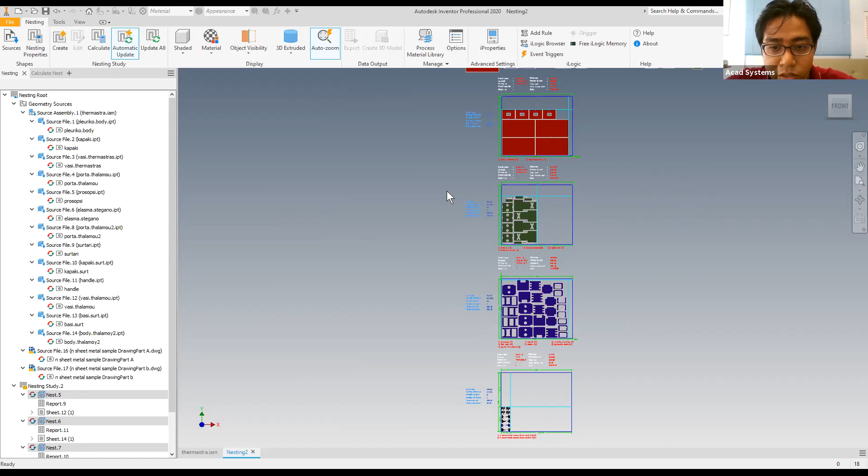Okay, so kat sini you boleh tengok lah. Bila saya dah recalculate, refresh, dia akan automatically adjust you punya stock metric kat sini. So this one will be kelebaran 3500mm dan juga kepanjangan 3000.

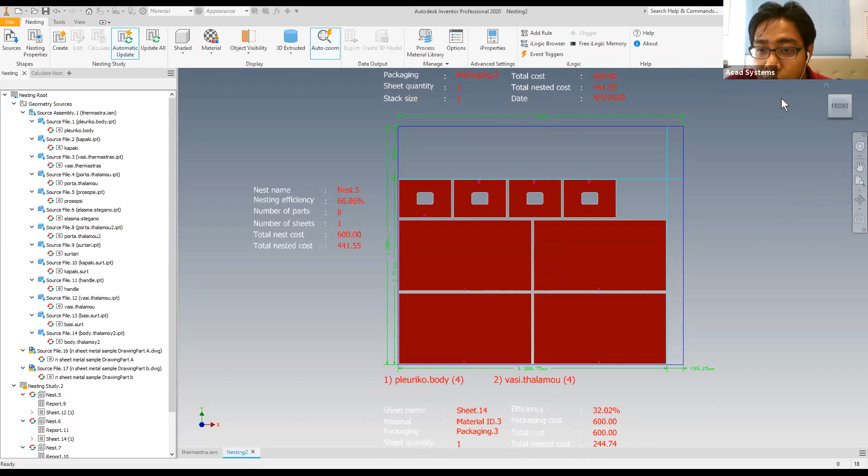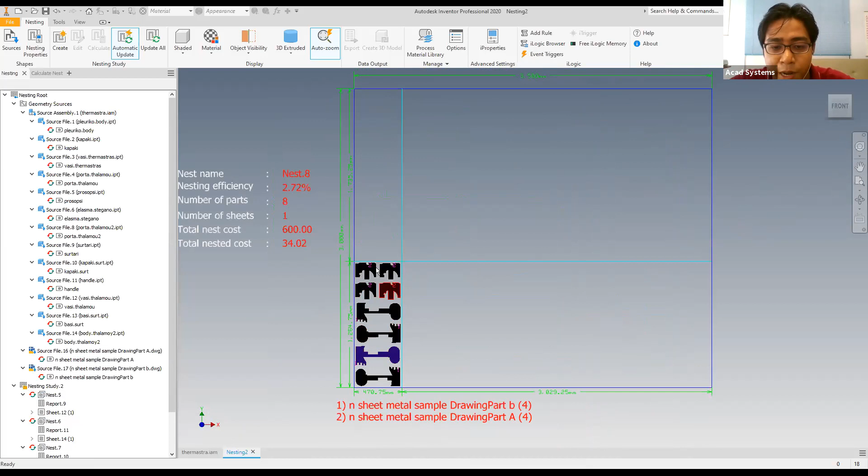Okay, so kalau you tengok ke bawah ni, ini dua part yang saya insert sekali daripada AutoCAD, daripada AutoCAD 2D sketching tadi. So kalau you tengok kat sini, daripada satu part ke satu part distance dia agak banyak, so agak membazir space. Bila you nak potong kat sini, banyak space yang membazir.

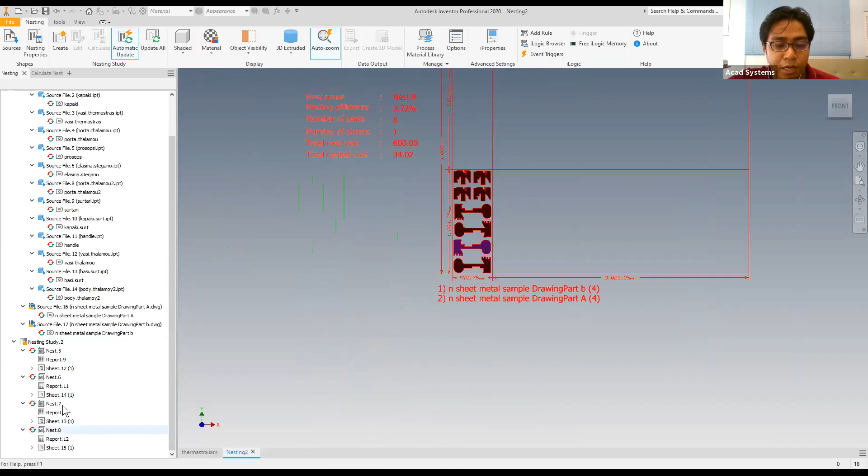Okay, ini kerana kita punya space dia on default, so kita boleh juga adjust. Macam mana kita nak adjust? Kita boleh pergi kat kita punya nesting tadi kat sini, pergi dekat kita punya nest. Macam mana you nak tahu? You boleh hover your mouse, so dia akan highlight kat mana nest yang you boleh kat sini. Untuk bawah ni saya just hover dekat nest, right click dan tekan properties, dan saya boleh just adjust dia punya item separation.

Okay, so sebelum saya adjust separation, maybe for the quantity saya nak add, instead of just nombor 4, maybe saya nak 40 quantity for one item, dan another item saya nak 20, boleh juga, tak ada masalah. Kalau you nak dekat dalam ni pun you nak adjust dia punya orientation pun boleh juga, just combine kat sini, dan orientation ni you boleh adjust degree untuk dia. So simply just tekan OK, dan dia boleh multiply dia punya part by part kat dalam ni.

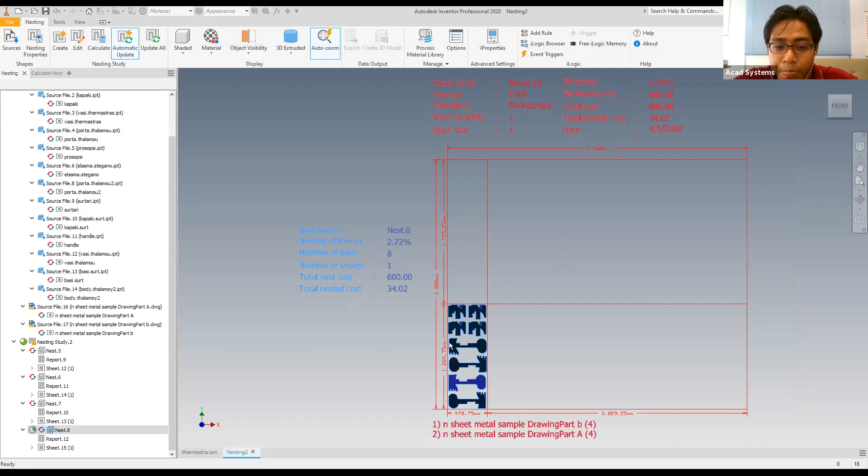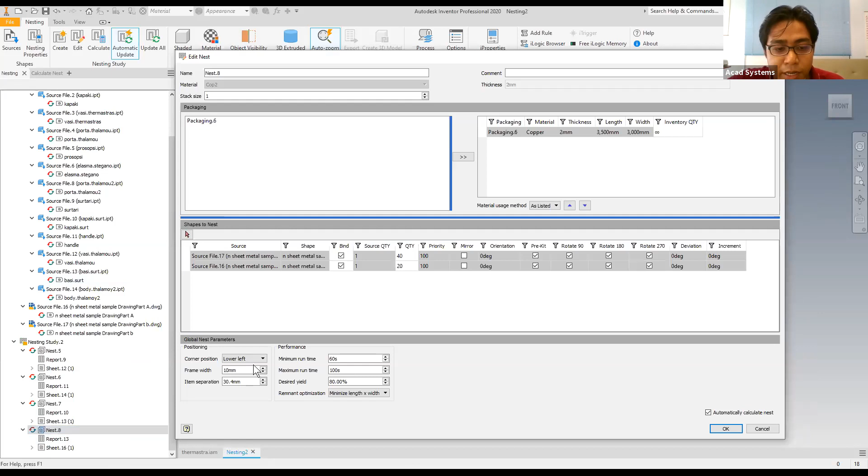Okay, so macam you tengok tadi, space banyak yang membazir. So apa you boleh buat, pergi balik kat sini, right click kat properties, you boleh pergi dekat item separation. This one will allow you untuk change dia punya item separation, which mean item distance item to another. So kat sini kalau you tengok, item separation adalah 30.4mm, so agak banyak.

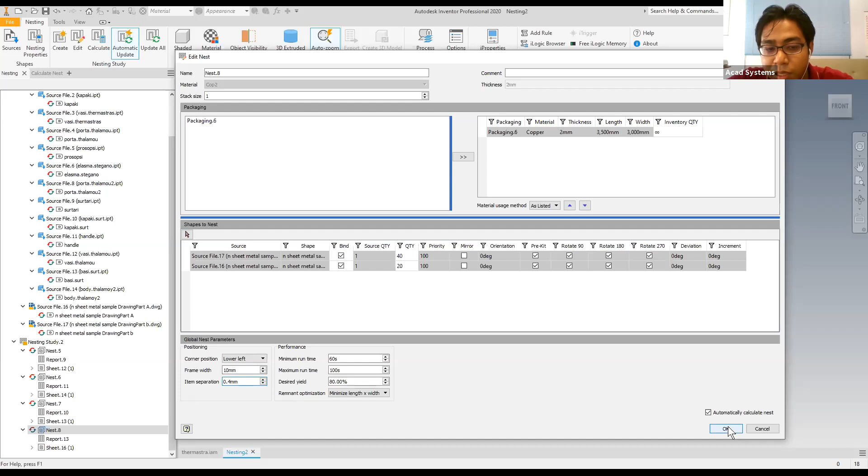So banyak space membazir, so you boleh adjust. Maybe saya just nak 0.4mm. So simply tekan OK dan dia akan automatically generate untuk you, dia akan susun dengan lebih rapat.

Okay, so dekat sini ada question, dekat demo ada beberapa result nest. Sekarang saya export all dan outputnya ada berapa file AutoCAD dalam nest yang akan datang. Bolehkah saya export AutoCAD semua nest dalam satu AutoCAD file? Okay, so this one I believe AutoCAD, I think better you part by part.

So maksudnya bila saya tunjuk saya punya part ni, actually this one just normal satu part sajalah. So if saya nak more than part, better you create one part asing. So you tak boleh letak semua part kat sini. Bila you transfer masuk ke nesting, semua part juga akan masuk dan dia akan anggap sebagai satu part. So make sure if you nak satu part saja masuk ke dalam AutoCAD ni.

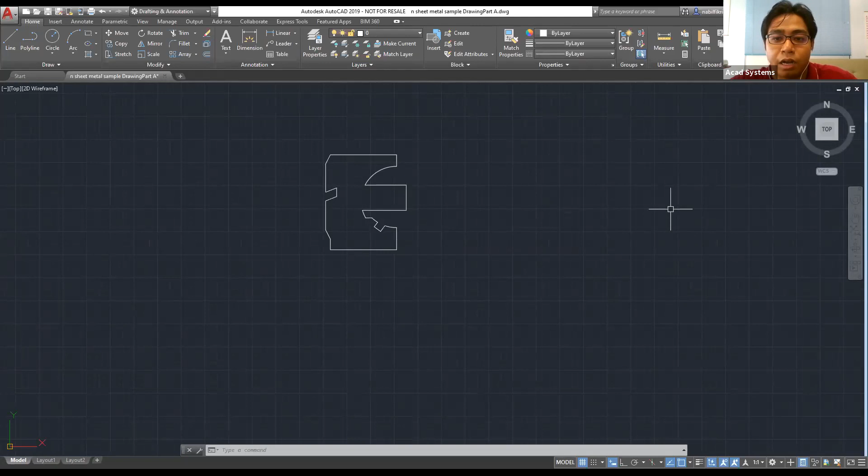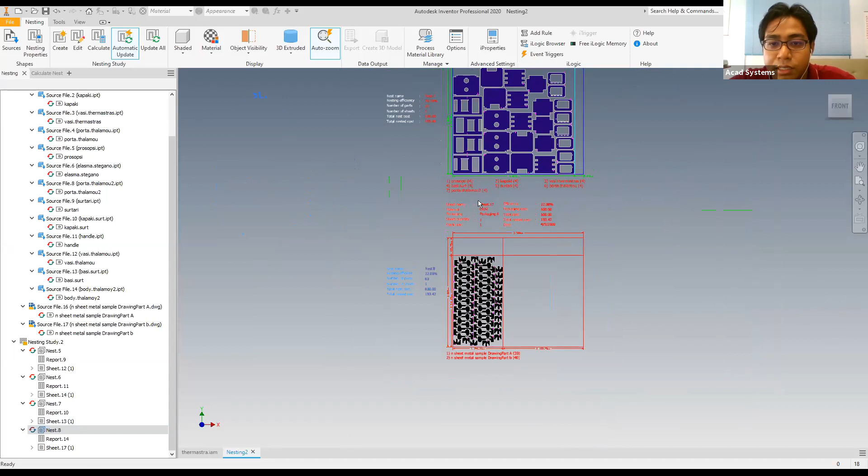Okay, so kembali semula. Bila saya adjust dia punya item separation, dia dah allow untuk susun lebih rapat. Okay, another thing is information. So you boleh tengok kat sini dia ada bagi beberapa information, including item part dan juga item quantity kat dalam ni.

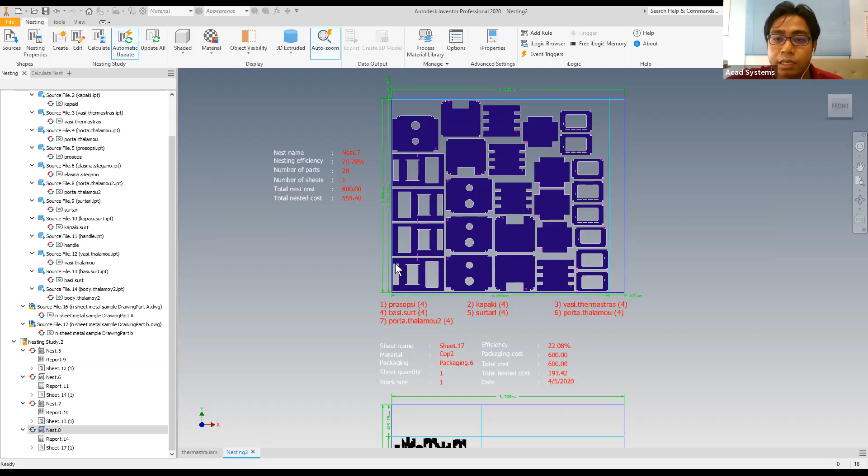Okay, another question, maksudnya dalam satu window nest export sekali dengan tulisannya. This one if you nak masuk, okay, so if say you nak export you punya nesting result ni, you nak export masuk ke dalam AutoCAD, boleh. Firstly you perlu right click dan export masuk ke dalam, export ke 3D model. So this one will generate part ni menjadi normal inventor part, which mean dekat dalam inventor normal part sudah boleh transfer masuk dekat dalam AutoCAD. Kalau you nak masukkan semua ni dalam AutoCAD instead of AutoCAD masuk ke dalam ni, pun boleh juga, tak ada masalah.

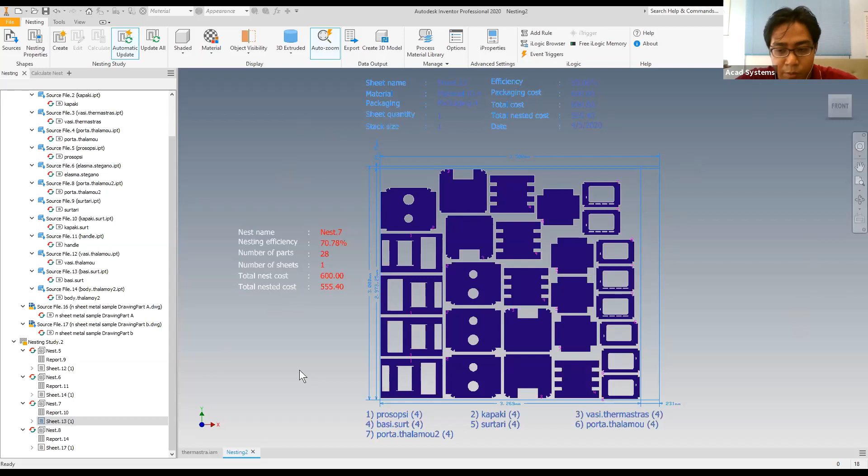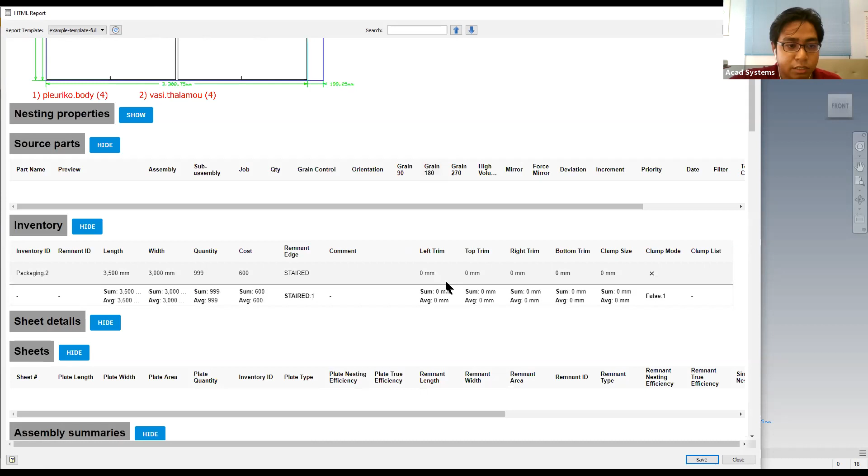Okay, so and then lastly yang saya nak tunjuk adalah report. Kalau you tengok kat sini beberapa information yang you boleh dapat. Kalau you nak more information, boleh pergi dekat nesting kita tadi and then double click dekat report. Dia akan keluar report dekat sini, dia akan generate report untuk you, dan kat sini you boleh dapat more information yang you boleh cari. Dia ada nesting properties, inventories, sheet details dan so on.

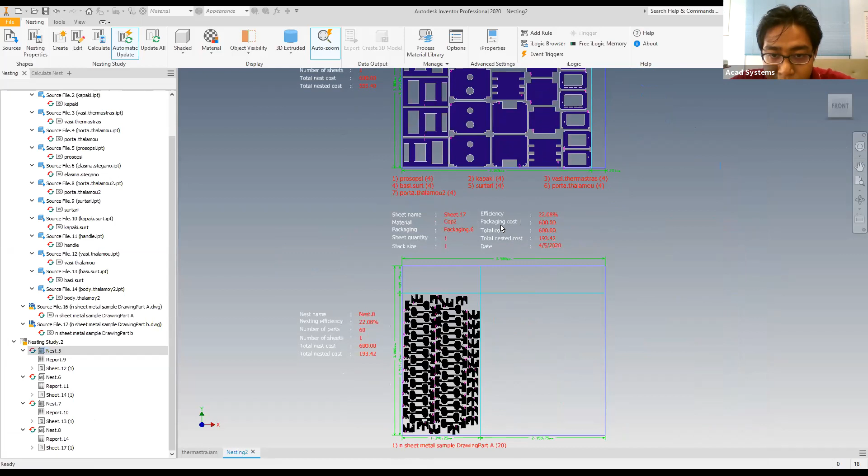Okay, so for demo I will try to create 3D model first. Maybe saya just tekan kat sini, right click, dan then tekan create 3D model. So this one akan transfer masuk ke you punya normal inventor part.

Okay, so this one will be the normal inventor lah. Kalau you tengok sini dia bukan lagi dekat dalam nesting, so you boleh just adjust, edit, potong buang apa pun perubahan yang you buat kat sini. Dekat dalam inventor ni, nesting ni dia takkan ada perubahan. Apa-apa yang you buat kat sini dia takkan adjust dekat nesting ni. So you boleh just potong buang apa pun boleh.

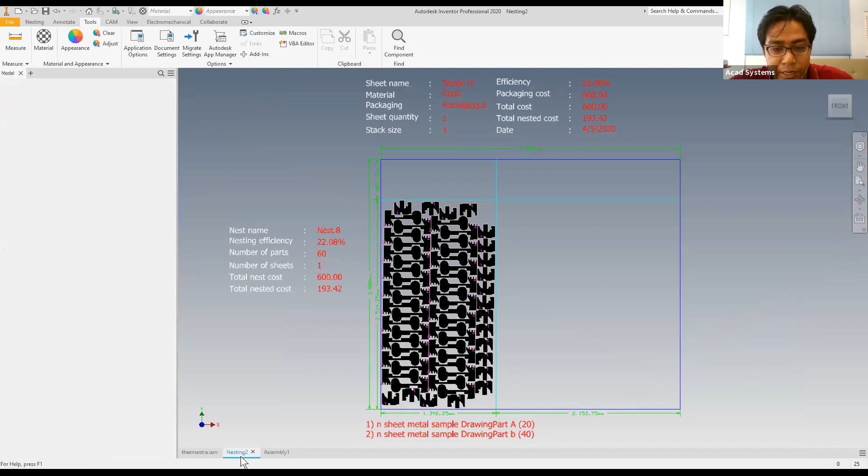So you nak transfer part file ni masuk ke dalam AutoCAD. Firstly just simply save dalam inventor punya part. Then another thing, maybe you nak save ke dalam inventor DWG pun boleh juga. So kat sini berbagai cara yang you boleh buat. Untuk pastikan daripada nesting ni masuk ke AutoCAD, firstly make sure masuk dalam, convert dia ke dalam 3D model. So macam ni.

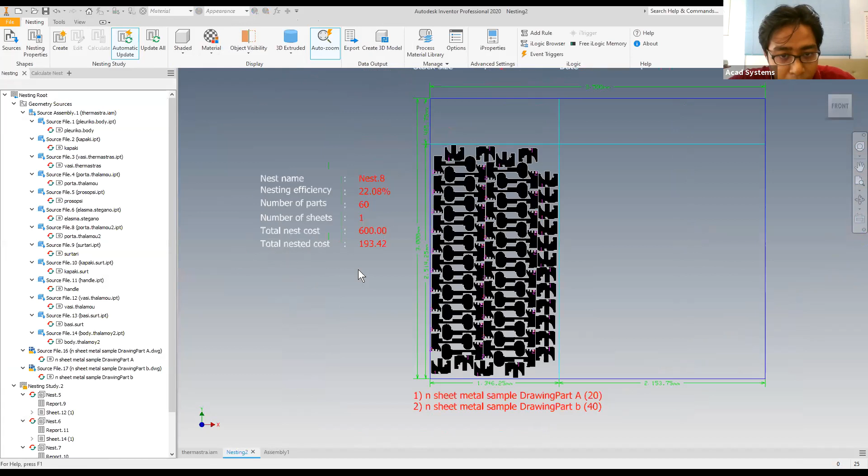Okay, so for the list part, I believe this one cannot transfer directly. Not sure if it can be transferred. So I believe you need to go into the assembly file first, then convert it into an Inventor part. So the information will be able to go into AutoCAD 3D. So you can only insert the part itself. So is there any other question?

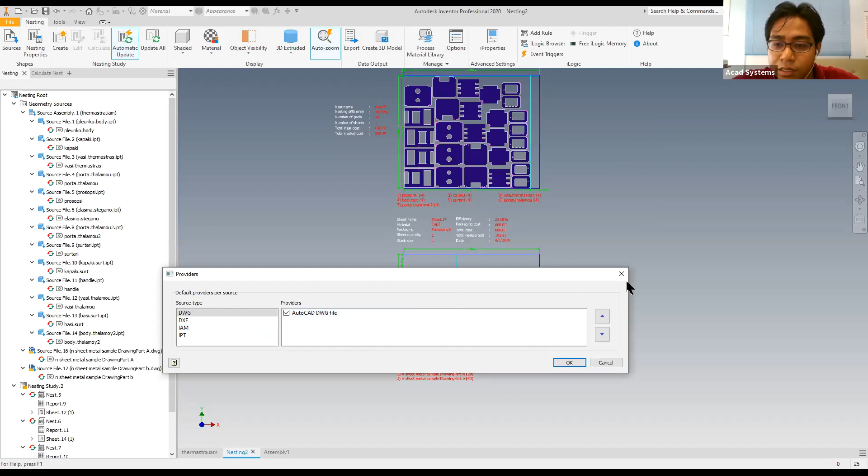No problem, you can just do the setting and then save as template, save copy as template. Okay, so can we set iLogic nesting and iLogic sample? This one I'm not sure. Maybe you can ask us on our website or on our Facebook page.